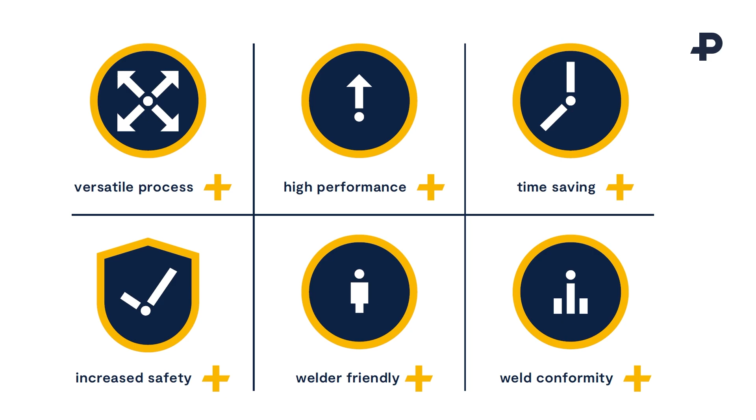Our first point of call was the alignment, and we've been working on this for some time, but it was quite an engineering challenge for us, so we've done lots of things at the same time. For clarity on this, when you're putting a weld together, you either have two rail ends or you've just cut a hole and you're doing some stress work - you've got a gap between two rails. But a key challenge at any joint is dipping, and making sure the process of getting that alignment right is done really accurately - i+align is part of that. Because if you get that wrong, you've started badly with your weld, right?

Absolutely, and the accuracy there takes time, effort, and skill. I like to refer to it like a bricklayer - you see a bricklayer building a house and he's throwing the bricks on, he makes it look very simple, and you think, I can do that. So you build your own wall, and it's falling over. It's the same with this. You see the welders in track banging the wedges and think, yeah, I can do that. If you've ever had a go, you're like, wow, that was really difficult. It takes time to get it right.

Even when you're a very skilled welder with years of experience, it can take you anywhere between 15 minutes to 25 minutes to align a weld.

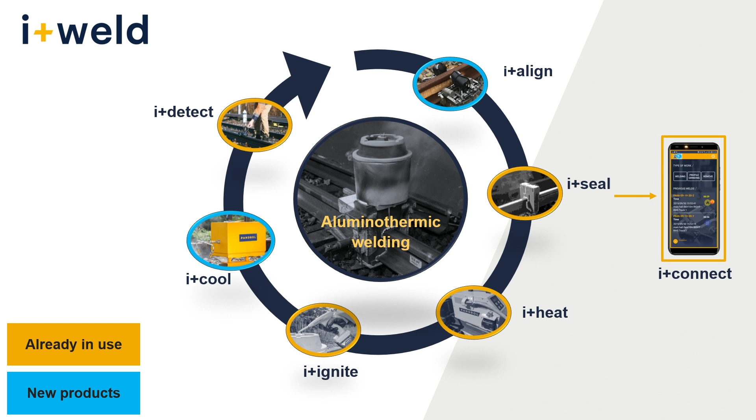Our alignment system, this system which we're demonstrating today at 2 o'clock, can be used by one person. Clip it onto the rail, put all the measurement devices on, and we're looking at a complete alignment within 2.5 to 3 minutes with one person.

The key thing to point out is there are hundreds of thousands, probably millions of welds out on the network. So if you're out on a shift and you've got 40, 50 welds to do over a big renewal, or even just going in for a quick maintenance job, every bloody minute counts.

So you're talking about a massive saving. It's a huge saving, huge time saving.

And the exciting bit is that applies to today's methods as well, so you can apply that straight in today's method and save a chunk of time. But the exciting bit is you don't need to keep to the existing method. There are things we can change now, and it gives us the scope to look forward and think we can do things differently.

We can prepare a site before the welding crews get there. All of a sudden, your output just increases.

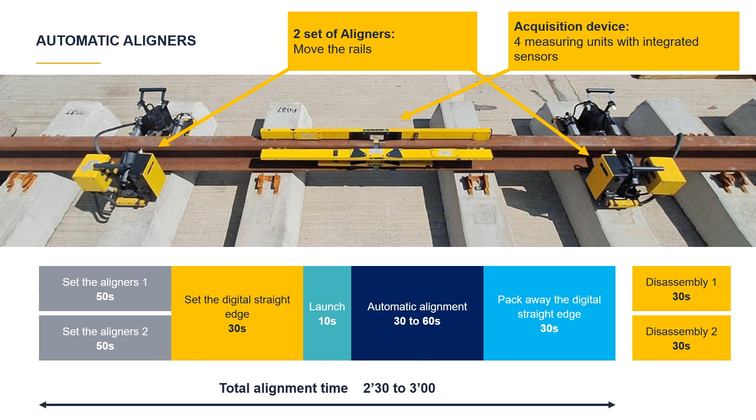So for the nerdy project managers out there, your Gantt chart, you start to be able to stack resources rather than like a single line, which obviously stretches out.

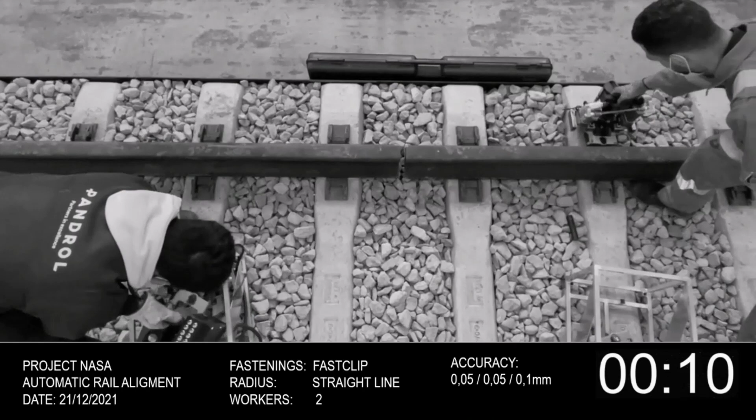So this is a video of the alignment system actually working. If you can't come down at 2 o'clock, this is pretty much what you're going to see, but you get to see it in person.

These alignment systems just clip onto the rail, very easy. There's a couple of actuators which clip onto the rail, which you'll see in a moment.

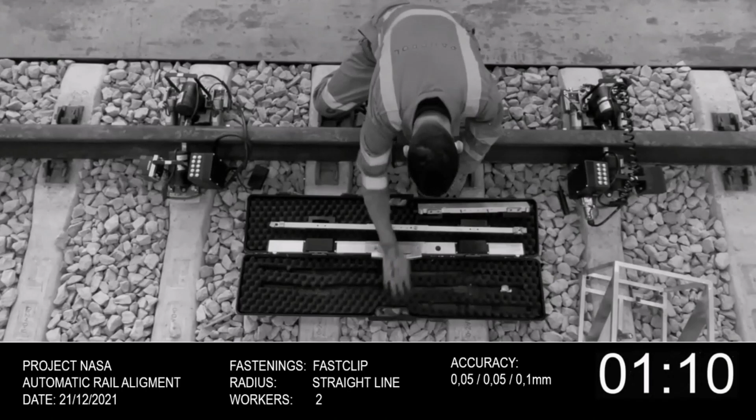Down the bottom right-hand corner, you'll see a real-time counter. So far, from the start, it's taken 1 minute 10 seconds. The real-time counter is slightly sped up, and it will speed up even more. But this is a complete alignment of the joint from start to finish, and in today's methods, you're looking at around 15, 20, 25 minutes depending on the skill level of the welder.

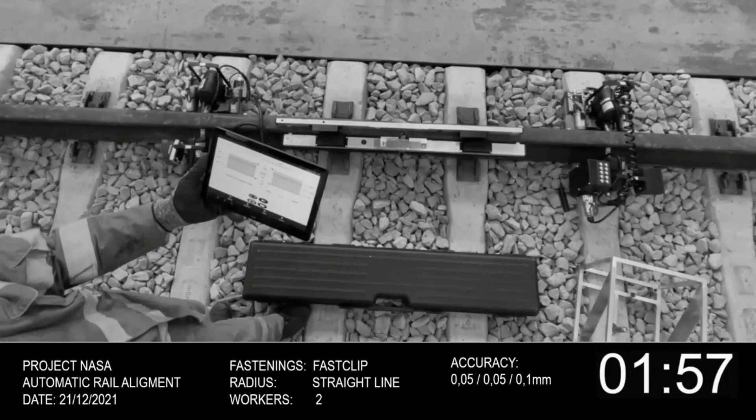So we've put some alignment devices on with lots of sensors, and we press go on our application. You'll see down the bottom corner, we're at 1 minute 57. The i+connect application is connecting with all this equipment, telling it what to do.

You've just locked that into the FASTCLIP housing, it just hooks in. This is the systemic thinking piece, which is really useful about what you offer. That housing is ours, so you clip into the existing housing.

I don't know if you can see the measurements on there, but on the lateral, you are within 0.03 of a millimeter. That's fantastically accurate.

And again, 3 minutes. What was that? 2:57. Yeah, that's really good.

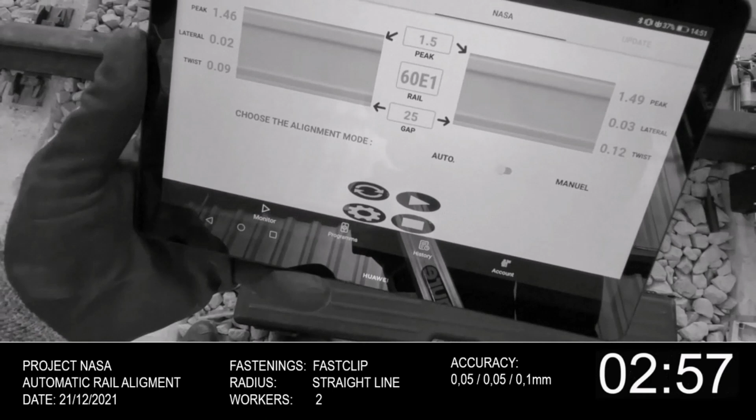And then all of that data is controlled by our application. It's also logged in real time, and our application logs every other step of the weld as well. So does that mean, since every weld has to be certified, that the data's basically auto-filling in that certification? Again, accelerating that process, and you get a lot more traceability that way as well.

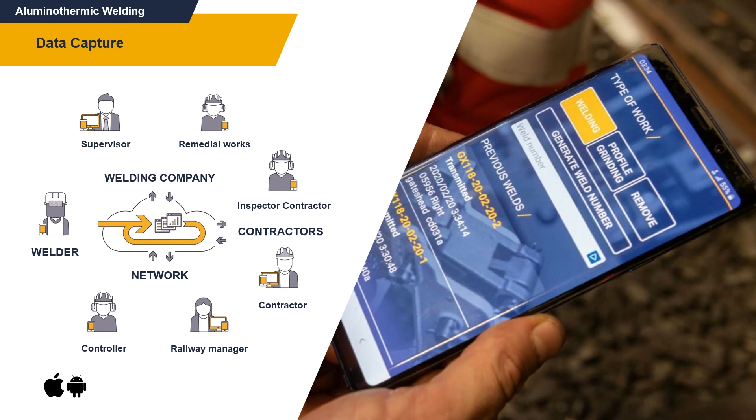You can record the accuracy, and the good thing about this is we give access on Pandrol Connect to the contractors, we give it to the site managers, so everybody can input into the weld. It even comes down to the network owner if they want access to that data. So anyone can input into this data and get hold of it.

Fantastic, okay, so let's talk about i+seal. We're working our way around to the next step. We've got the alignment right, but the weld still doesn't exist yet. So i+seal, this is just a very user-friendly system, again, to speed up the welding process.

Today's traditional method, if you've ever seen a weld on track, you'll see welders bent down on their knees, grabbing sand, doing an operation called luting, packing the sand around the welds. It's a manual operation, not a very nice thing to do, especially when it's freezing cold. You have to get sand out of the van, or try and defrost the paste. It's very labor-intensive, 10 to 15 minutes on your knees in the freezing cold in the ballast. i+seal does away with that.

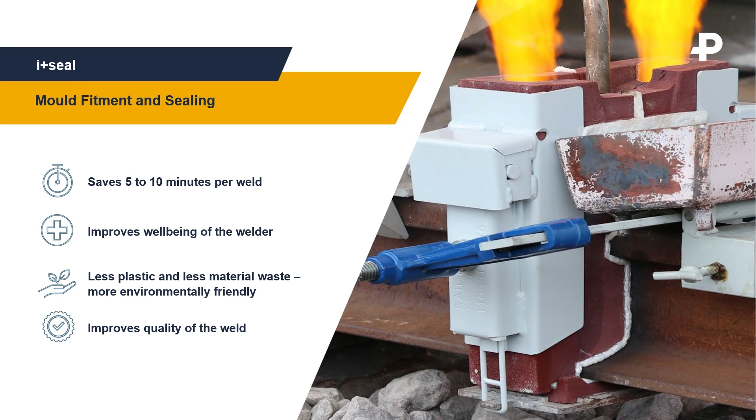You just put the molds on and you walk away. It's very simple, and the seal expands with heat. So the heating process, which comes next, activates the seal and completely seals the mold in. Fantastic, so again, you've gone through and saved time here, saved time there, thinking about the whole process.

So then we get to i+heat. i+heat is aimed at pure quality. One of the biggest defects throughout the world, not just UK, is preheating defects. When you mix oxygen and propane, which is probably the world leader in terms of what people use to preheat the weld, you generate temperatures of around 2,400 degrees on the oxygen propane flame.

If you put that in wrong in the weld, you can burn the mold, burn the rail end, and end up with lots of inclusions and other defects originating from the preheat. We recognized that, and we said, you know what, we can do better than that. So we've developed a preheating system that runs on two 18-volt batteries.

It's just plug-and-play batteries. You plug it into a propane source, just a normal propane cylinder, and you turn it on and press start. It does everything else for you—it lights itself, times itself, and shuts itself off. At the end of that, you get a beautifully balanced preheat, defect-free.

Yeah, that's the key. We're getting into the fun metallurgy stuff, and we have to be careful not to get lost having too much fun talking about metallurgy. But managing the rail end is a key part. If you've got thousands and thousands of welds, the quality of those welds is absolutely key in the overall asset, because those are naturally weak points. The weld material itself is the strongest part of the weld, the rails either side are the weak point, so anything you can do to improve the quality is positive, and this preheating helps towards that.

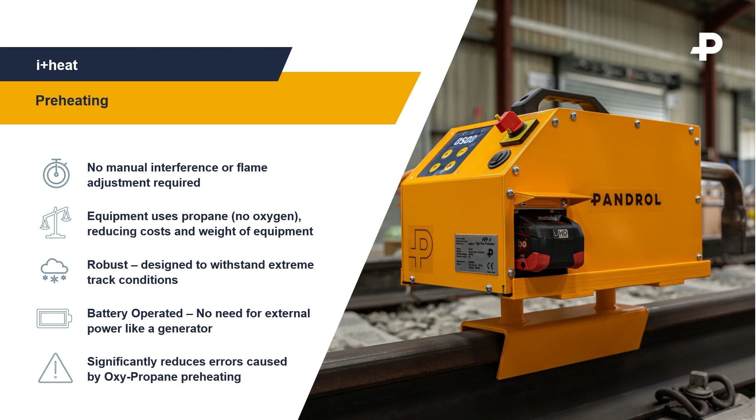What I want to talk about is the process. It's a really nice, whole, complete solution. You've looked at the whole process, picked out things you can't change, but everything you can change, you have. Firstly, how long has this been in development? Or would you say this is a natural progression of what you're doing? What has that story looked like?

It's been a natural progression. As I say, when I first approached Network Rail about improving things, it was like, no, okay. Then they came back to me a year or so later saying, okay, you know what, we've listened. Blue sky thinking, what can you do? I said, leave it with us.

So I discussed it with our product line, our technical engineers, and said, look, let's look at it, what can we do. We picked a product which was actually the i+ seal initially, and said this we could improve. We thought maybe we can improve alignment, so it was just a case of picking something. There's an element of organic growth of actually being able to apply that thinking to other products.

It was a very traditional way of starting some of these projects. It was me and one of the R&D guys having a beer, sitting in a pub, going, well, what about this? And that kind of started really, 10 years ago.

This is partly why it's important that you guys support the engineering theatre, but also generally Rail Live. It's those sorts of conversations where two people go, oh yeah, we were thinking about it, can I attach this to your machine, or can I do this - those organic conversations. So I suppose the thing I'm shouting is Rail Live is where these opportunities for innovation often come about, so it's good that all of you are here and attending this.